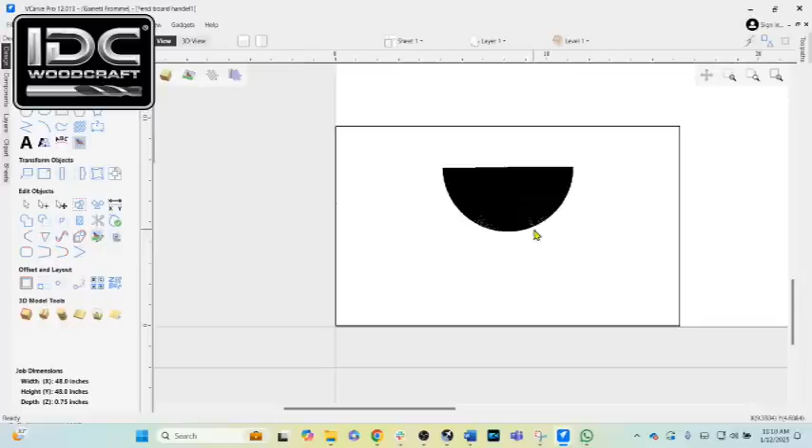So we're now in the Vectric software. I am using Vectric version 12, and this is Jerry's design. You can see this is kind of the half orange shape. Let's preview the toolpath and preview all toolpaths. And this is what his project ends up looking like. It's a very simple type of cut.

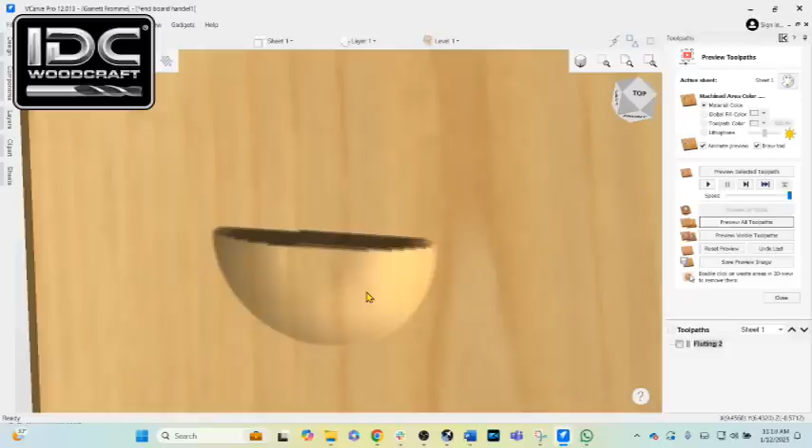Now, he's using something called a fluting toolpath. The fluting toolpath is great to use, but it wasn't going to work very well in this particular project. So I'm going to show you what the fluting toolpath is, and then we are going to get into the better way to do this.

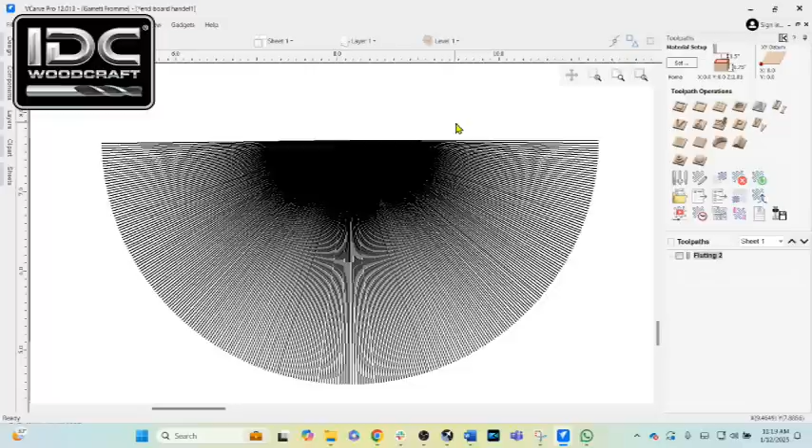So when we go over to the 2D view, let's turn some things off here. And when we zoom into it, you can see a whole bunch of radial lines. The project has all these vectors that go all the way around, and his router bit is cutting along every one of these vectors. I'm going to show you exactly what his router bit is doing. I've got to turn something off here.

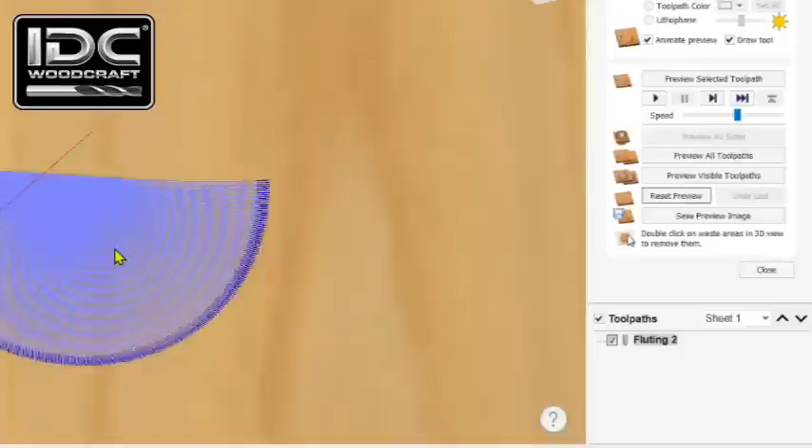We're going to go to the preview toolpaths again, and I'm going to use this slider right here and bring it down about halfway. We're going to reset the preview, select the fluting toolpath, and make it visible by clicking the checkbox here. You can see there's a lot of toolpaths in there. When we get really close, the router bit is making so many different moves.

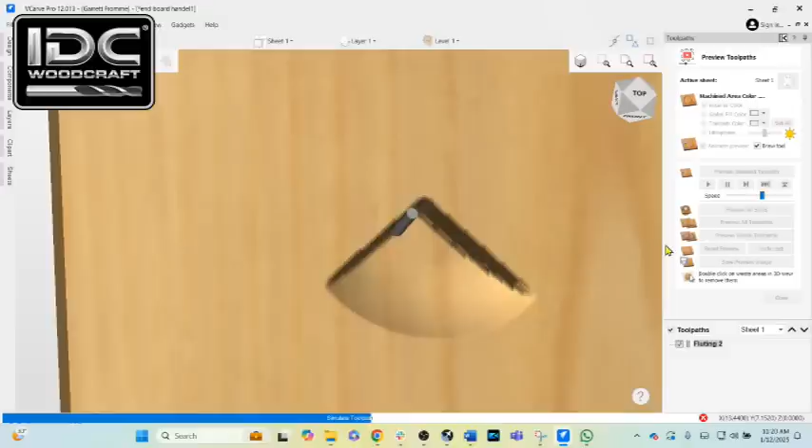Now I want to show you what this is going to do. We're going to preview the toolpath. You can see that router bit is following every one of those lines. It does that little cup shape, but you can see how it is moving around this entire project and cutting each line, just shaving a little bit off at a time. It's starting from the upper middle of the handle right in here. Just a lot of moves on the bit.

Now we're going to take a look at the time that this takes. I'm going to close this preview and click the summary of all toolpaths, and the time says 22 minutes just to cut that little handle. Jerry makes bee boxes over and over again. That 22-minute run is way too long for someone who produces this kind of stuff.

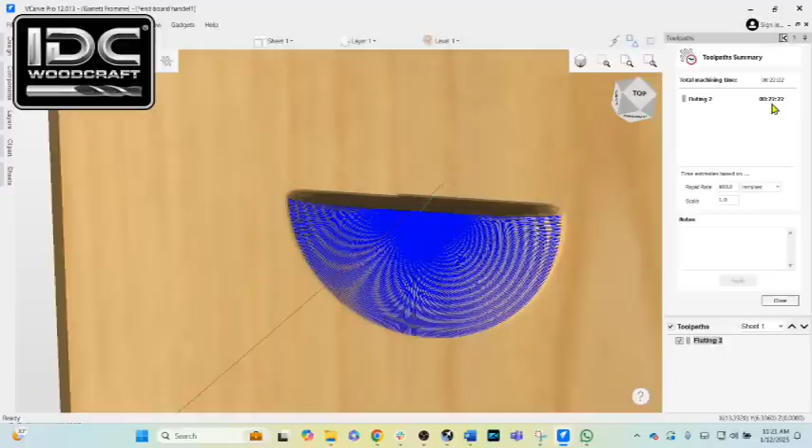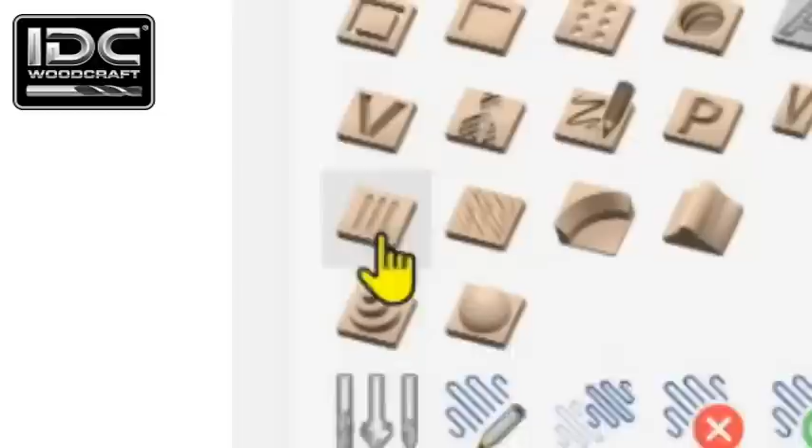So I'm going to show you a little bit about this fluting toolpath, then the quick fix that's going to cut this down to 5 minutes. We're going to close that, go to the 2D view, and zoom out. I'm going to get rid of this little box, and you can see there is a line that I drew, because I want to show you what a fluting toolpath is. We are going to go to this toolpath icon right here. When you hover over it, it says Fluting Toolpath.

Select that, and we're going to select the vector, just the line. First of all, we have to set our start depth, and that is at 0. Our flute depth will be 0.5, or half of an inch. I'm going to use a 1/4 inch ballnose end mill.

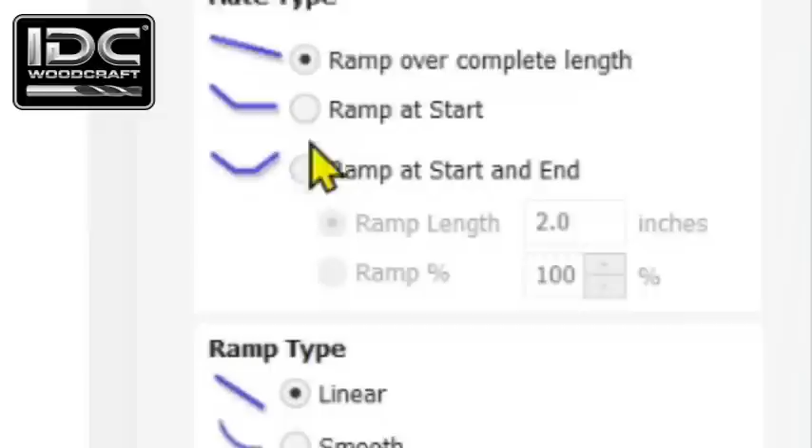Now there's 3 different flute types we can use. We can use a ramp over the complete length, so over the entire length of that line it's going to ramp in. The next one is we can ramp at start and probably ramp at a distance. And then the last one is we can ramp in and ramp out. Below that is the ramp type: there's a linear or straight ramp, and then there's a smooth ramp.

So let's fiddle with these 3 up here. I just want to show you real quick, because this is definitely something you want to learn how to use, especially if you're making something like a soap dish where the water needs to drain off. So we're going to use a linear ramp. What a linear ramp in a fluting toolpath is, it's basically a cut, and that cut is going to go in at a ramp.

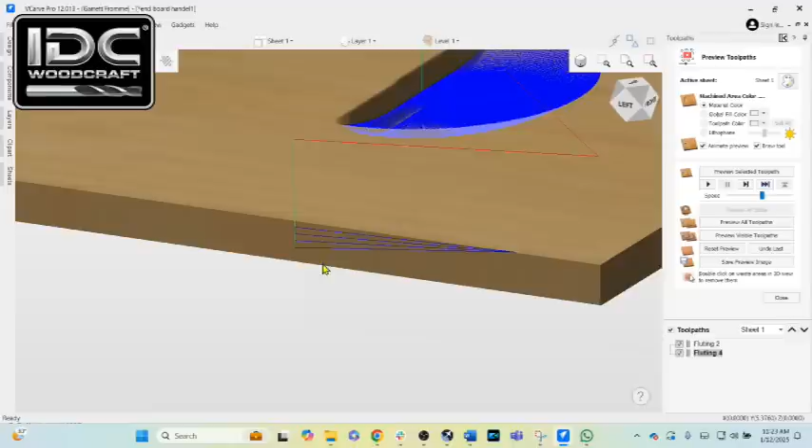So we're going to calculate that toolpath, and we're going to swing this around over here, and I just want to turn off this toolpath. You can see, let's turn that material off. We're just going to use a wire frame for the material.

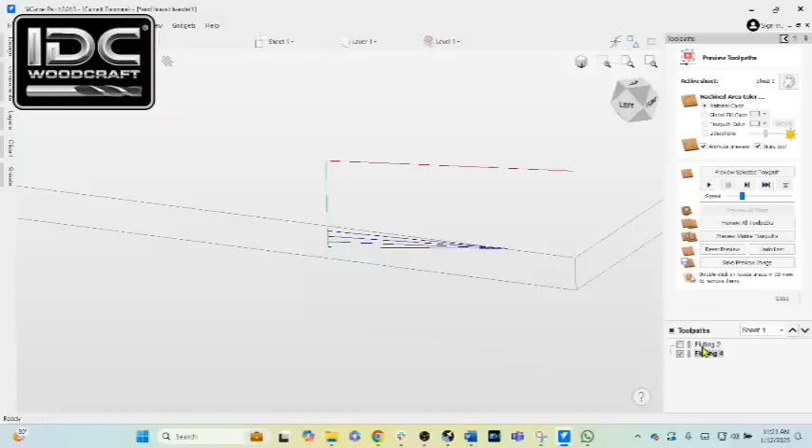There we go, and you can see how the router bit is going to go. Now what this router bit is going to do, it looks like it's going to ramp it over to here and then come back. Let's see what it does. I'm going to slow it way down, and we are going to preview the visible toolpath.

Now you see this one is checked, that means it's a visible toolpath. We're not going to preview this toolpath here. And let's preview that toolpath.

Okay, so the router bit is going to start over here, and it's going in and out and making a cut. So we're going to turn the material back on, and you can see what it's doing.

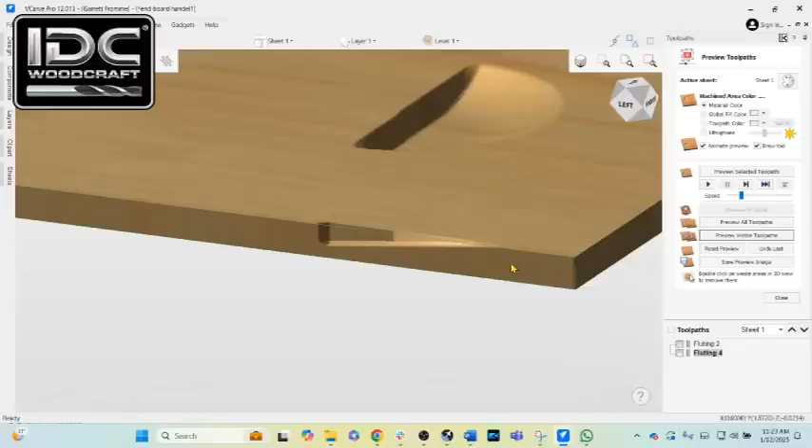I'm going to reset the preview and preview the visible toolpath. Oops, it has to be selected. And so the router bit comes in here. So it started on the opposite end, I'm not sure why I did that. But anyway, that is a flute toolpath, the one that just ramps straight in.

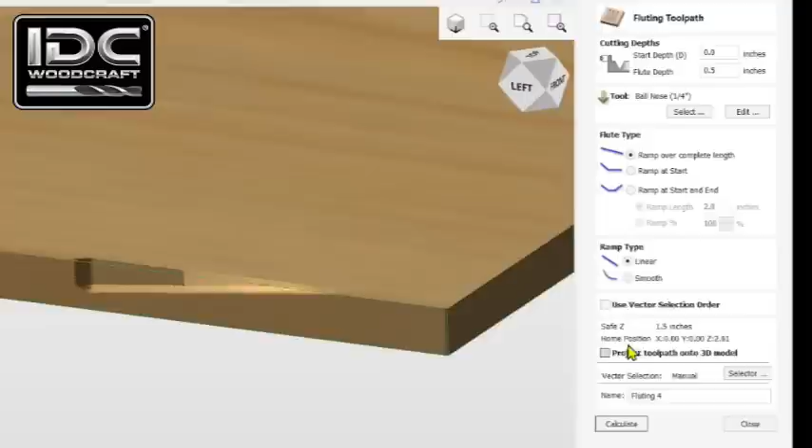Now we're going to go back into that toolpath, double click it, and we're going to select ramp at start. And we're going to set up our ramp distance.

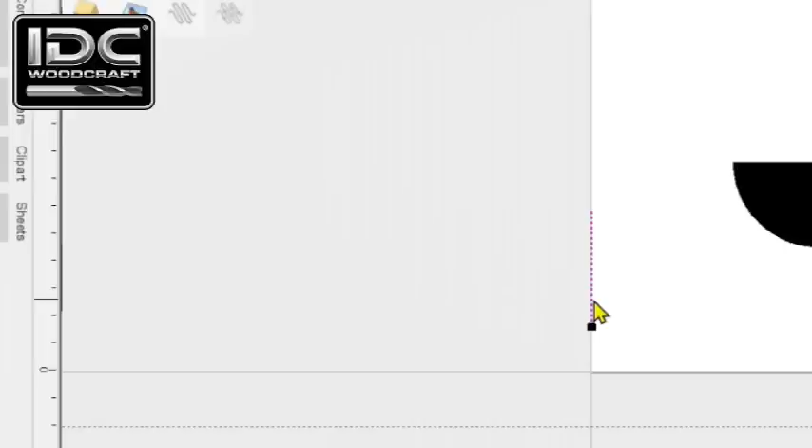My line is probably, let's see how long that line is. It is about maybe 4 inches long. The way I could tell, just quickly looking at the line, is by looking at the scale over here on the left. If we really want to know exactly how long that line is, then we can hit F11, and we can go to, I believe, where's that measure icon? I don't use it that much.

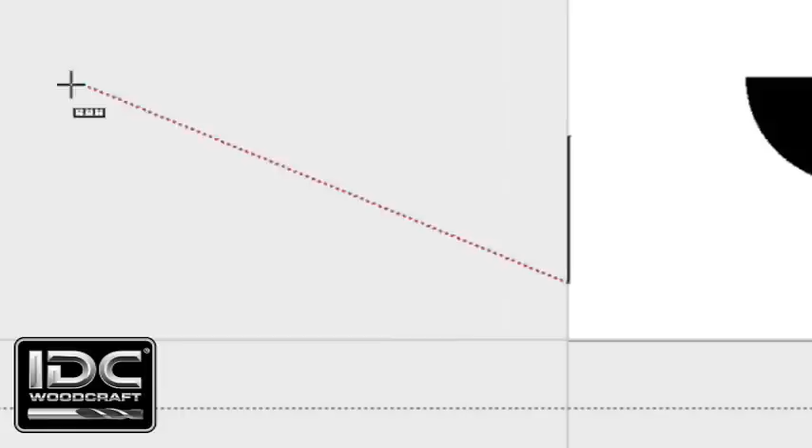So there is an icon, there it is, this is XY. We click that, and then we simply select the top of the line and then the bottom of the line. Oops, there we go, top, okay. And our line is 4.2 inches long.

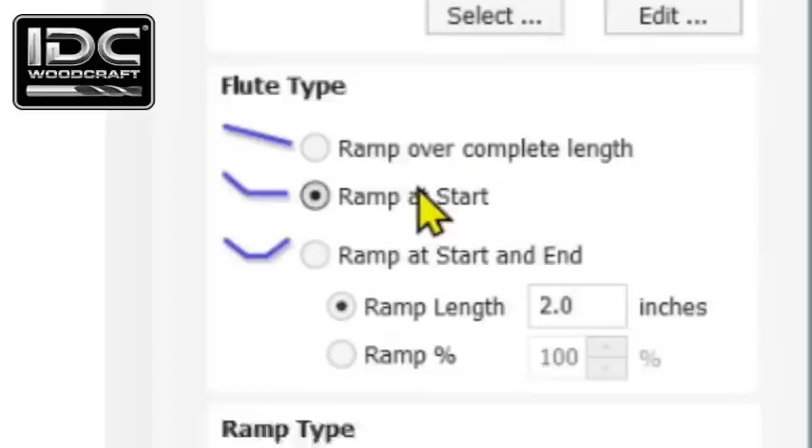So, okay, we're going to close that. We're going to hit F12 to get back to the toolpath menu, and we're back in this fluting toolpath. Now we're going to use the ramp at start, and we can dictate the length of the ramp, so it is 2 inches. We can also say the percentage of the ramp, the percentage of the line. I'm just going to go 2 inches.

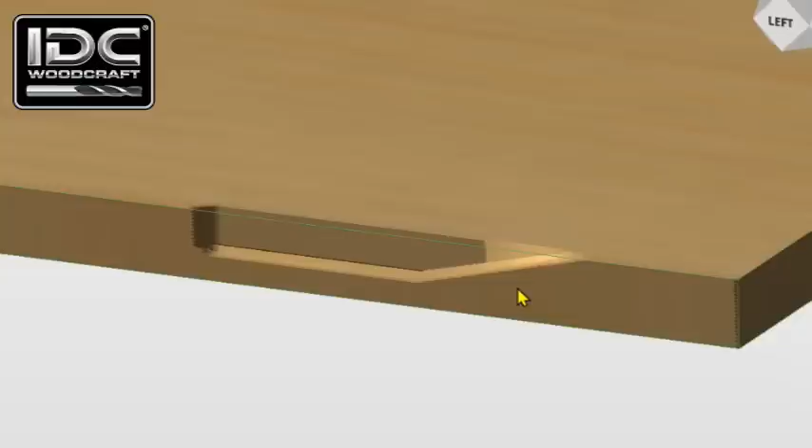We're going to calculate, and we're going to reset the preview and preview visible toolpaths. Now I'm going to speed it up just a little bit. Now you can see the flute actually goes down like that. It ramps for 2 inches, then it goes straight out.

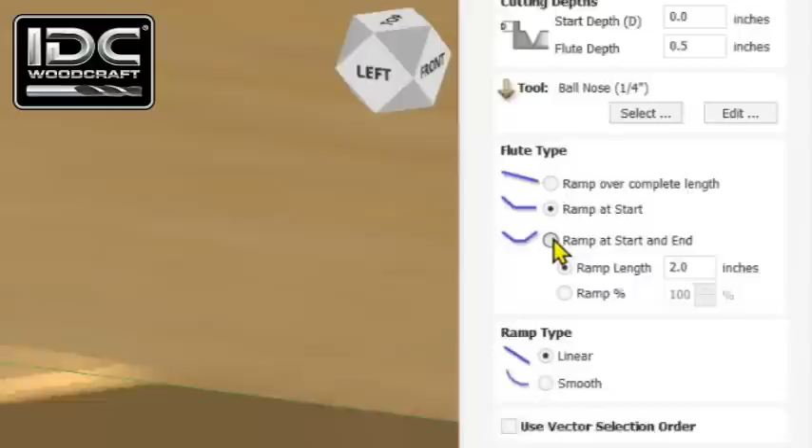Now, the one I like the best is the radiused one, but this is how the ramped flute works when you can set the distance. Now we're going to go back into that toolpath, and I'm going to ramp at start and at end. And then we're going to set the ramp length to 1 inch. What it's going to do is ramp down 1 inch, go all the way across, and at the last inch, it's going to ramp back up. So we're going to calculate that.

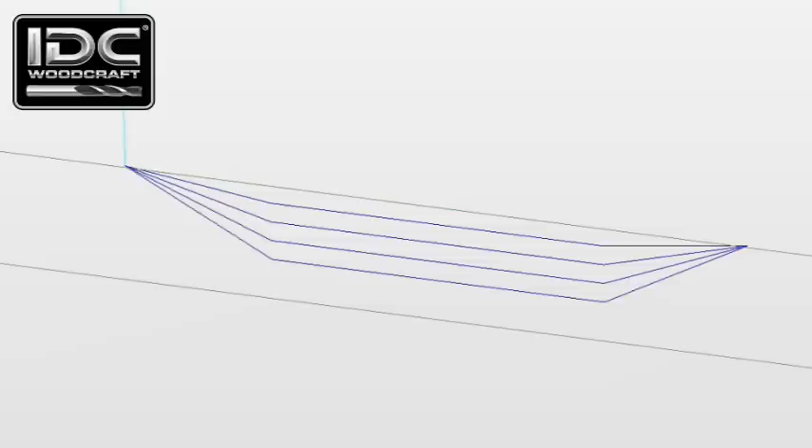And you can see in the toolpath lines, that's exactly what it's doing. So I'm going to turn that back on. We're going to reset the preview and preview visible toolpaths. And there is our fluting toolpath with a ramp on both sides. But now we can get the radius in it too.

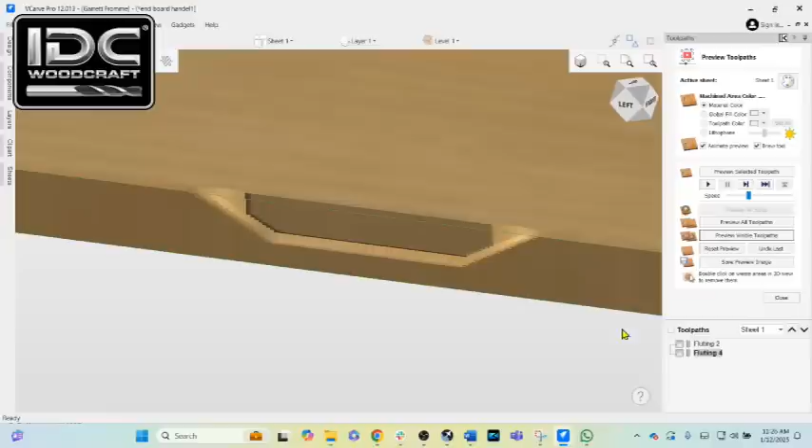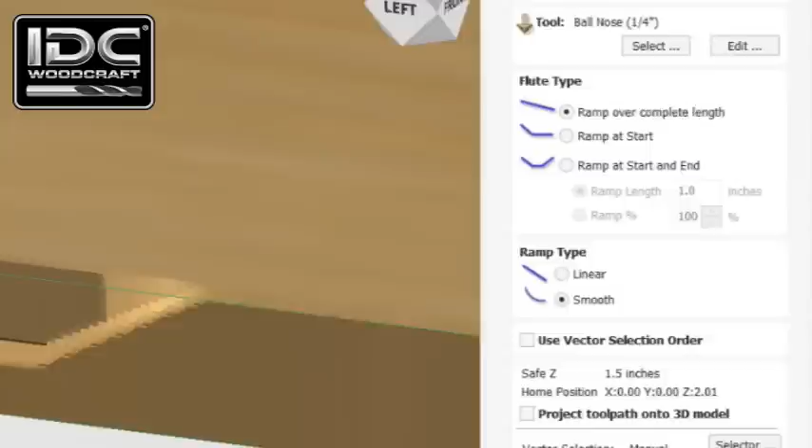This is the one that I really like. So we're going to go back into that toolpath, and instead of linear, we're going to go to smooth. And that smooth is going to be dictated relative to the ramp length. So we're going to take the linear, or the ramp, the complete length, and we're going to leave it smooth, and I'm going to calculate it, and now we're going to reset the preview and preview the visible toolpath. And I'm going to orient this to the left so we can actually see what it looks like. So what this is, basically, you can see it is an arc that it created all the way through the project.

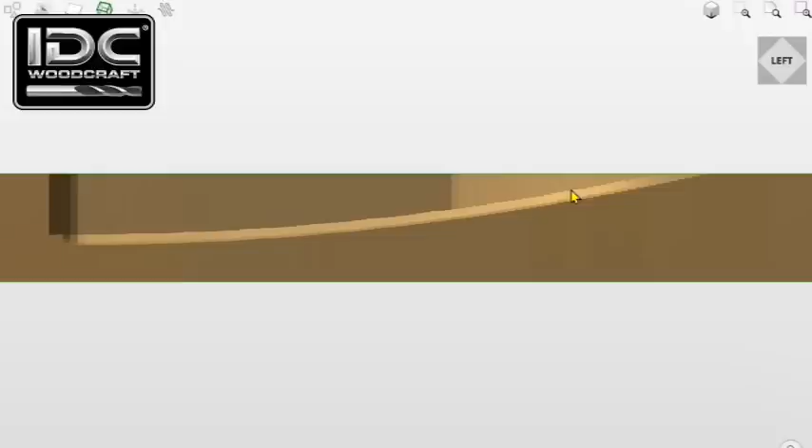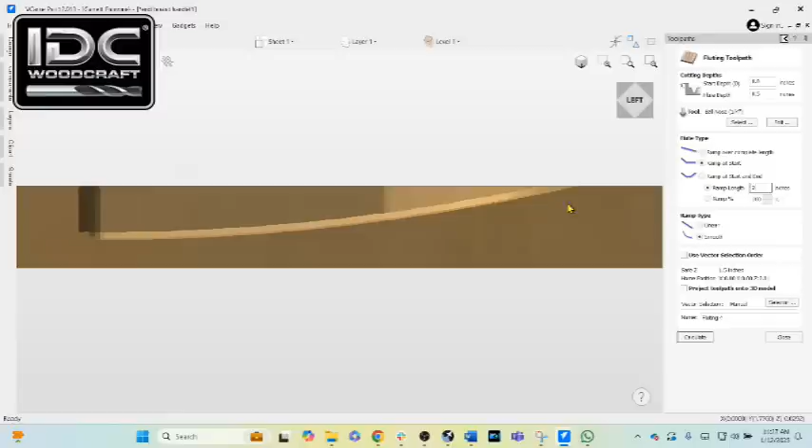Let's go back into this, and we're going to ramp at the start. We're going to use the second selection. We're going to dictate the length of it. We're going to go back to 2. And so what it's going to do, it's going to ramp at a radius for the length of 2 inches. Then it's going to flatten out and go the rest of the way. We're going to calculate, reset the preview, preview visible toolpaths, let that run through, and there you go. You get the nice little arc ramp right there, and then it goes straight.

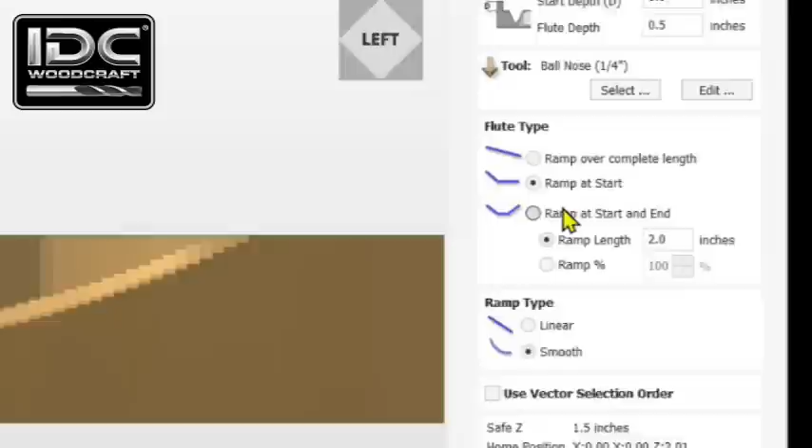One more setting with the fluting toolpath, and then we are going to go into how to fix this project that Jerry has. Now we're going to ramp at start and end. Going to click that. I'm going to go 1 inch, and with this setting, it's going to ramp down in at an arc. It's going to go across, and it's going to ramp back out. We're going to set it for 1 inch, so it'll ramp in at the first inch, and at the last inch, it'll do that arc ramp back out. Calculate, reset preview, and preview visible toolpaths.

So there you go. I hope that this little quick rundown about the fluting toolpath was helpful, because this is really about how to fix this thing up.

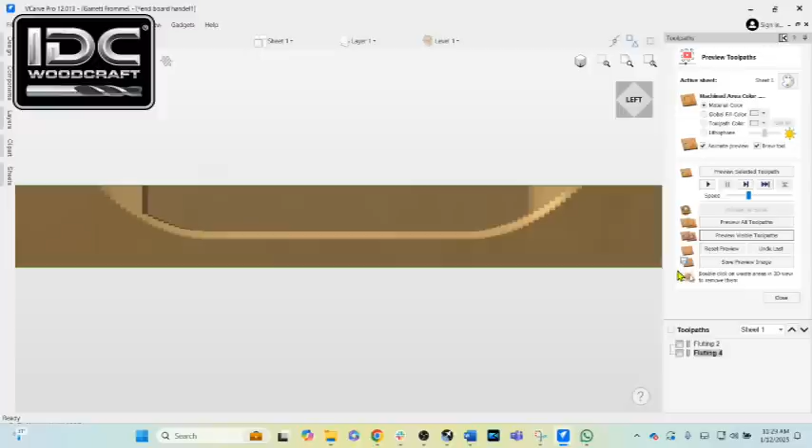So now let's take care of Jerry's project. Let's make this thing run a lot faster. First of all, I am going to delete this toolpath, and here's how you delete a toolpath. You can select it, and you know it's selected when it's got the gray highlight and it's bold, and just hit the delete button, and that toolpath is done.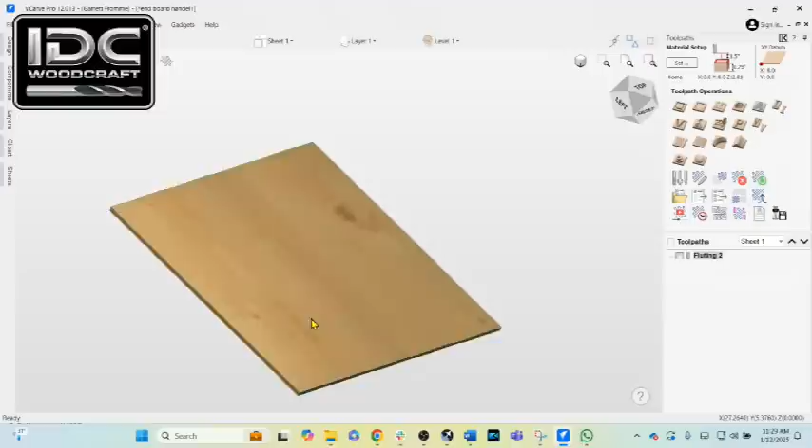I'm going to reset the preview. We're going to close this, and now we're going to just bring this out. So this is set up for Jerry's project, so it's a 48 by 48 size material. And I need to turn his toolpath back on, and there it is. And now we looked at that with the clock, and that is taking 22 minutes.

Really, really long. So here is how I redid this using the stuff in the Vectric software. Now this can only be done in the VCarve software and the Aspire software, but it's definitely an interesting little technique. And here's what I did.

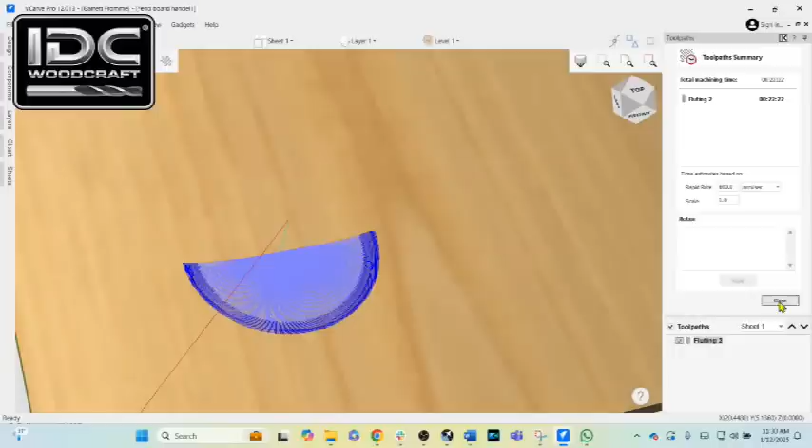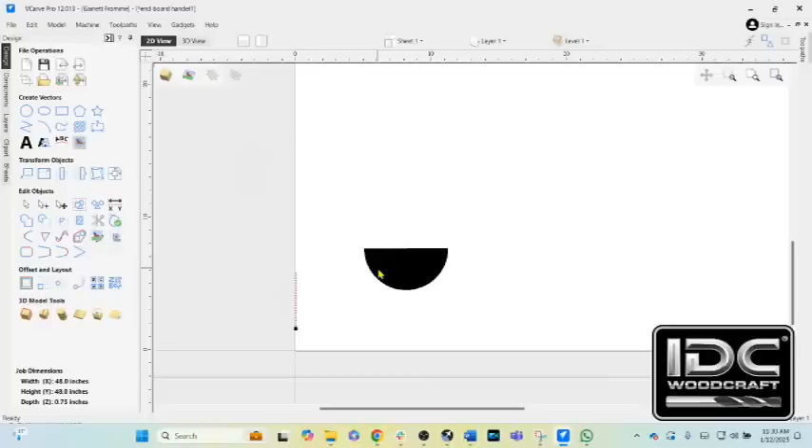So we're going to go back to the design area, and we're going to go to 2D view. And we're going to ignore Jerry's stuff here. We're going to make a handle. And the way we're going to make the handle is by using a 3D model that's in the software that comes with your Vectric software. And the way we get this model, it's going to be a dome-shaped model, is we go to Clip Art.

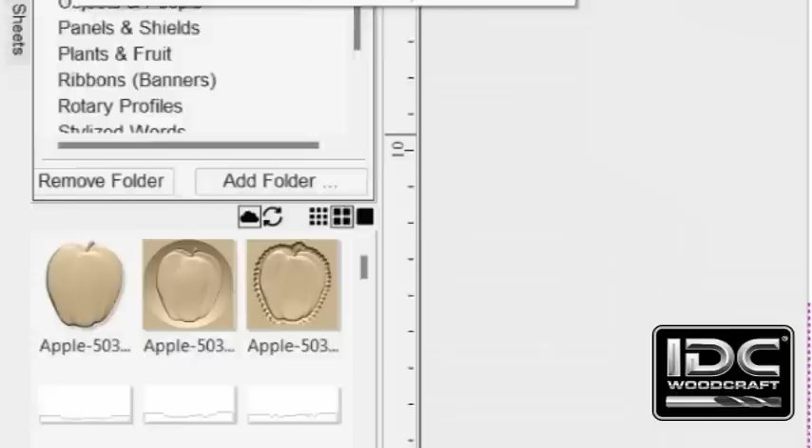There's a little tab all the way over to the left side. Select that. You'll see Clip Art and Design and Make. We want to click the Clip Art one. And this menu is going to open up. And we want to find the one that has domes. There we go. Domes is what we want. Click that, and we now come up with several domes.

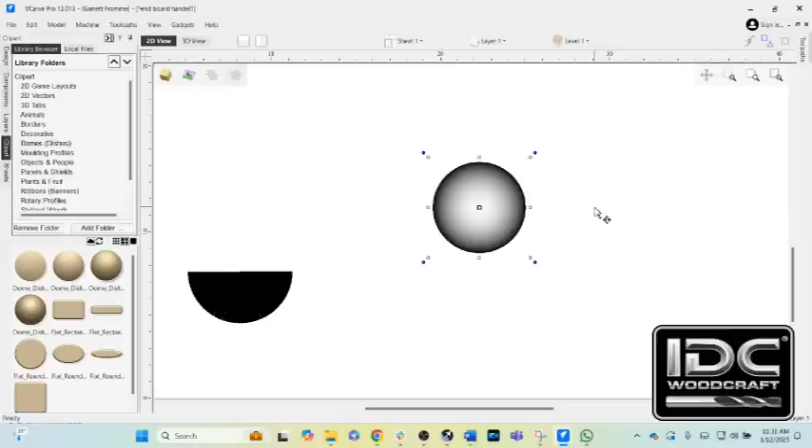Now we're just going to grab this dome right here. This is the deep dome. I'm going to just hold it with my left mouse button and drag it out into the field. Now, Jerry said, oh, I need this to be at a specific size. So first of all, we're done with the dome, so we're going to go back to the design area.

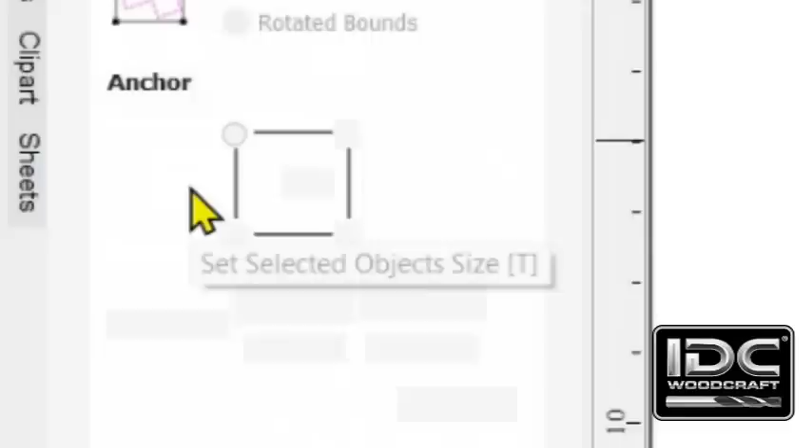So we're going to come over to this tab and click the Design tab. Now we're going to change the size of this dome to whatever we want, so we're going to scale it. The way you do that is come over to Transform Objects, the second button from the left, where it says Set Selected Objects Size. Now we can set our width and our height.

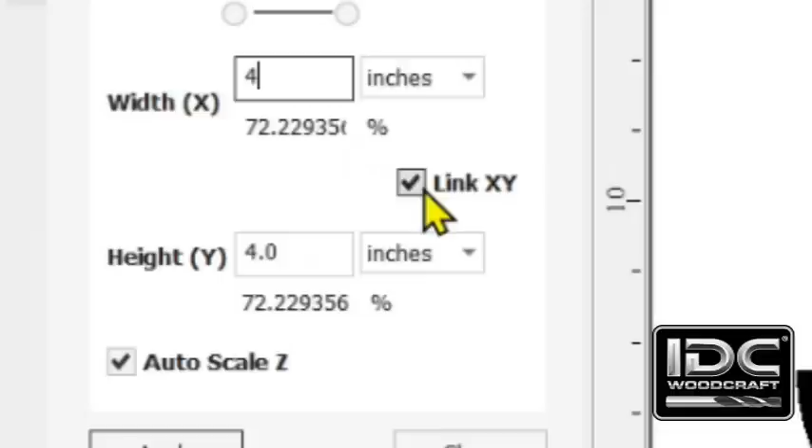He wants it 4 inches wide. We'll just say 4 inches wide, but the height needs to be different, so it needs to be taller. You can see it's 4 inches high as well, but when I have this Link XY checked, it's locking the scale of the width and the height. When I uncheck that, now I can change the height to, say, 6. Now watch what happens with the dome shape here. I'm going to click it, apply, and now we've turned it into an elongated dome.

Okay, so the handle, let's get a little bit closer to there. And it can probably be a little bit bigger, so we'll just upsize it. That's just one way you can change the size of it.

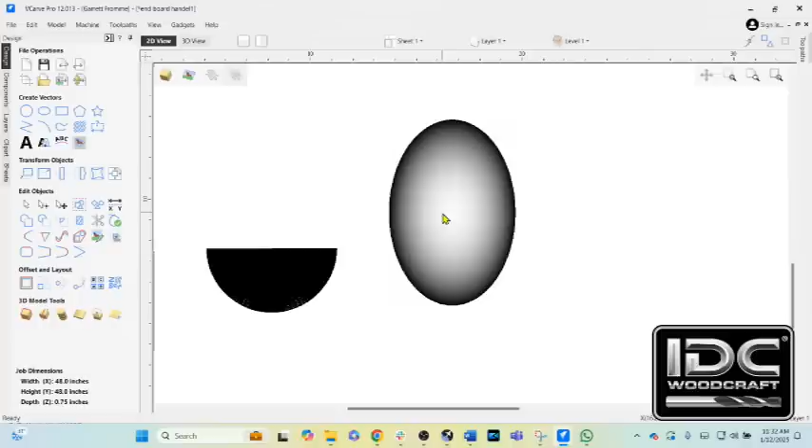So just showing you, now we only need half of this dome, but I wanted to split the screen side to side. I'm going to use this split screen button right here so we can see the dome shape. Now if you look at that, that dome is actually sticking up, and what that means is that 3D model is going to be up like that. We need to invert it so it goes into the wood so we can make a handle.

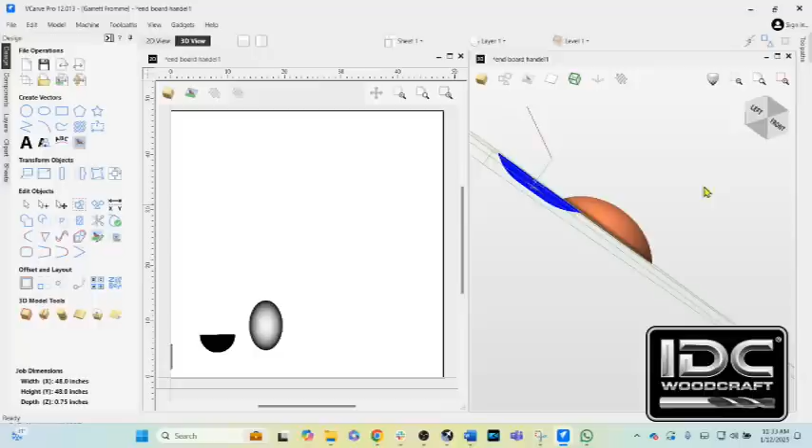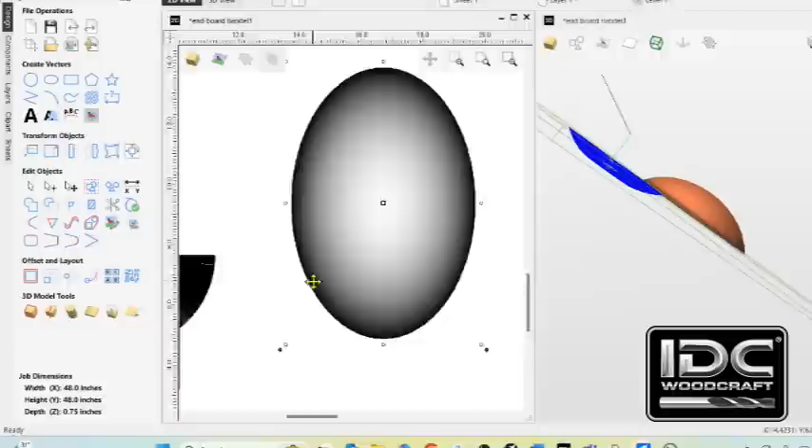First I'm going to set it up for the handle, because we're going to basically cut the dome in half using a special technique. We're going to come into the egg here and click that. In VCarve version 12 and higher, you come down to the bottom where it says 3D Model Tools. With the dome selected, we are going to click this first icon to the left where it says Create Vector Boundary. When I do that, it's going to put a boundary around the whole model, like a vector. So I'm going to click that.

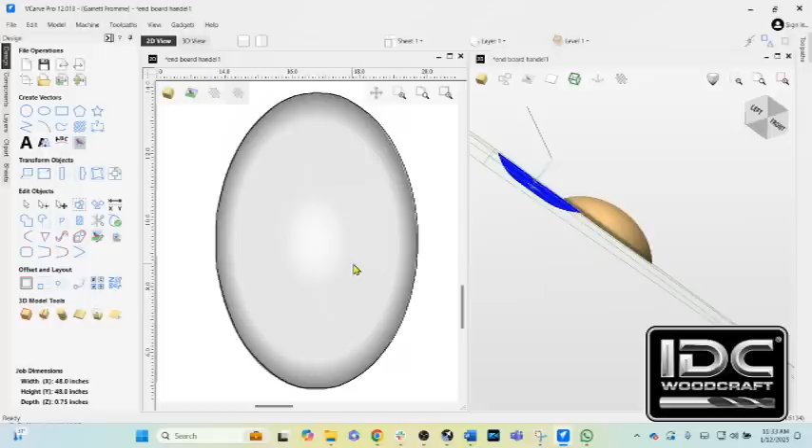We're going to zoom way in so we can actually see it. Click it, and you actually can't see it—it is right there. I'm going to click off the model. Now you can see the vector that it created, and it goes all the way around the dome. To make the handle, I basically need to cut it in half.

And here's how we do it. With the snaps turned on, these two buttons right here, they need to be like this light blue color. That means they're on. If they're off, they'll be gray, just like I turned this one off. Now I'm going to click it again—it's light blue, it's back on.

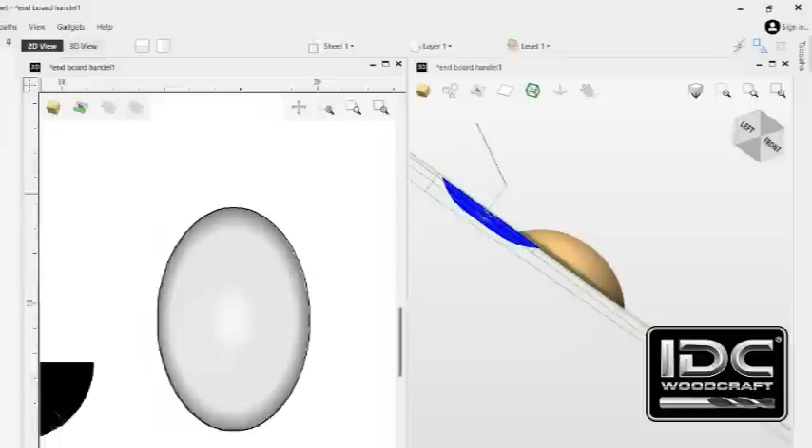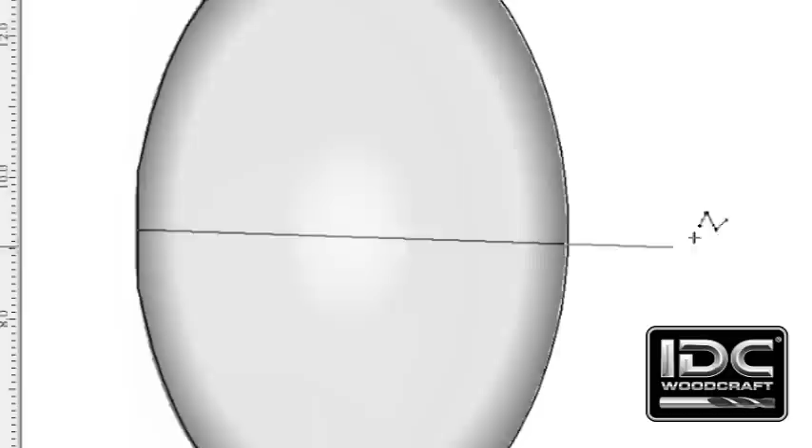We're going to get a line, polyline, straight line. I'm going to come down and find that midway point on this dome right there, which would be right where that cursor has changed. I'm going to click that, and it is now attached to that line. We're going to come across—let's expand this a little bit. There we go, and you can see that dashed line, that means it's going horizontal. I'm going to swing back until that cursor changes into that target with the dashed line, and then click.

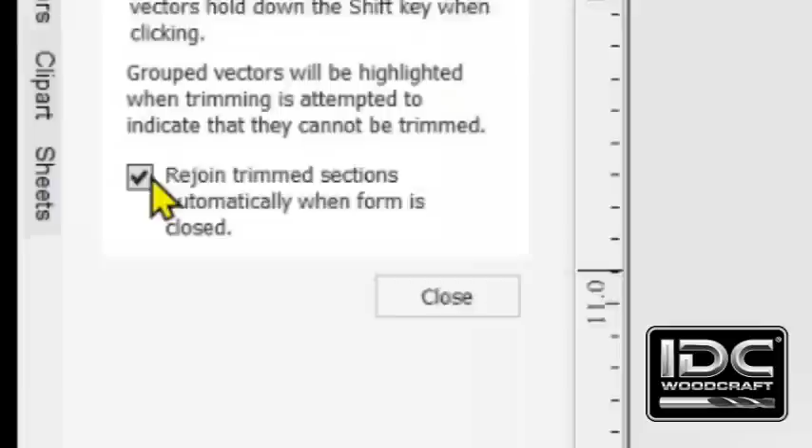Now we can hit escape to get out of line mode, and I am going to cut away the vector above this line. We're going to use the trim tool, the scissors—click that, and I want to make sure that this little checkbox is checked, because that will make sure that when we trim that away, the crossed line will rejoin with the lower line. So here we go, we're going to click that, and now we close that, and you can see what we've made. We basically made the handle shape on this thing.

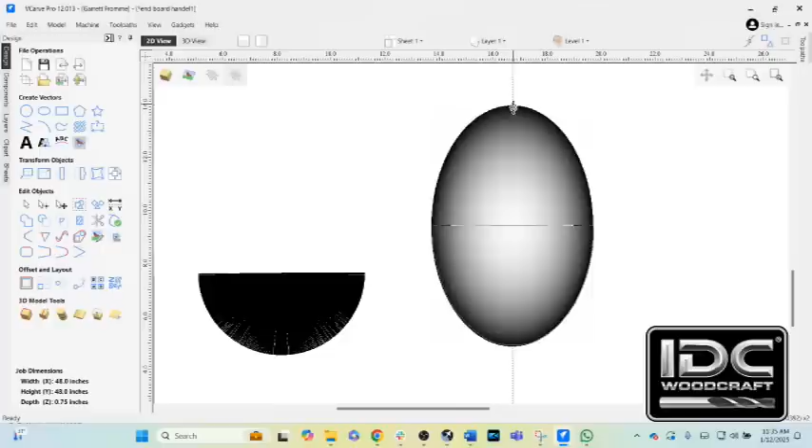It can be any size we want, any orientation. I'm going to just double click all that, and we'll shrink that down to more of a rounded size, and go like that. So there we go.

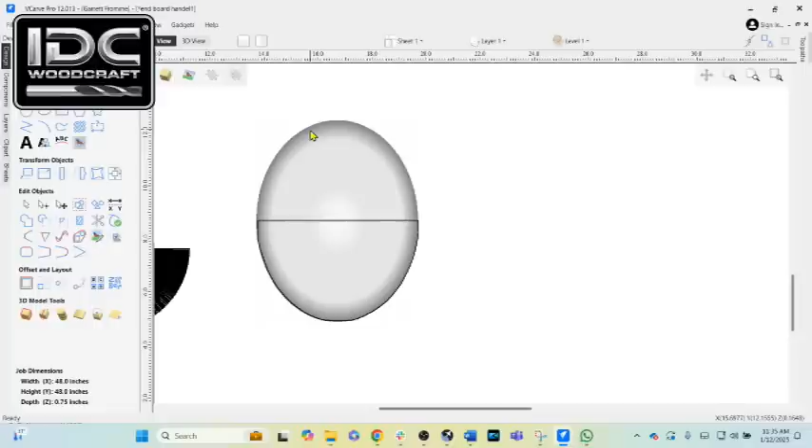Now we have to fiddle with the 3D model. We have to do some changes, because we've got to turn it from like that to inverted, or convex. So is that right? That's convex, concave—we've got to make a concave. So here's where that little 3D modeling trick comes in. It's some tools in the Vectric software.

We're going to split the screens again side to side, and I want to reorient this. We're going to click on that model in the 3D screen and click on it again.

And now you see all these little icons come up. Now the depth of his handle is 5/8 of an inch thick. The material he's using is 3/4 of an inch, and the depth of the handle is 5/8 of an inch thick. So there's 1/8 of an inch left of the material.

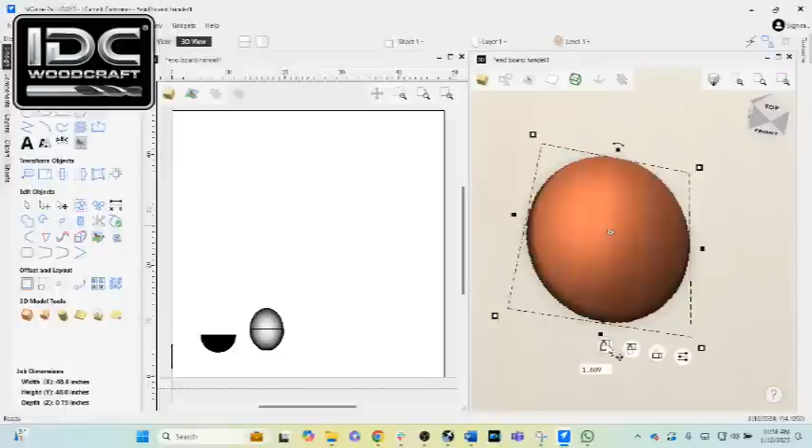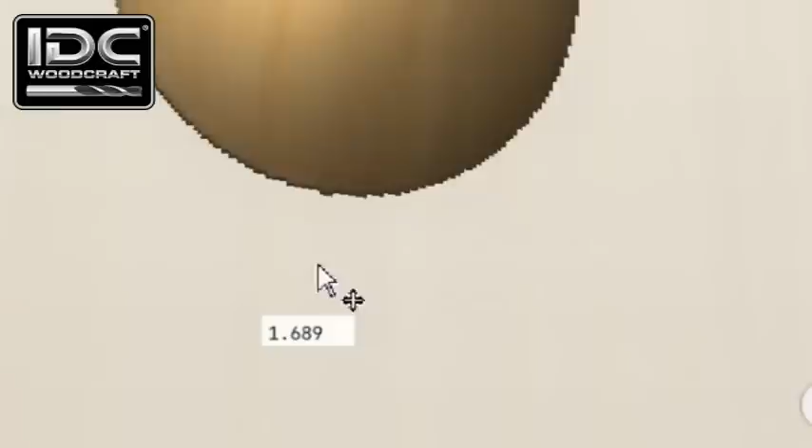So we're going to set the shape height, the overall shape height, by clicking this button right here. And you see when I'm hovering over it, the 1.689 shows up. When we click on this, now we can edit this number, and we're going to change it to 0.625 and hit enter. And now we just changed the thickness of it, as you can see right there.

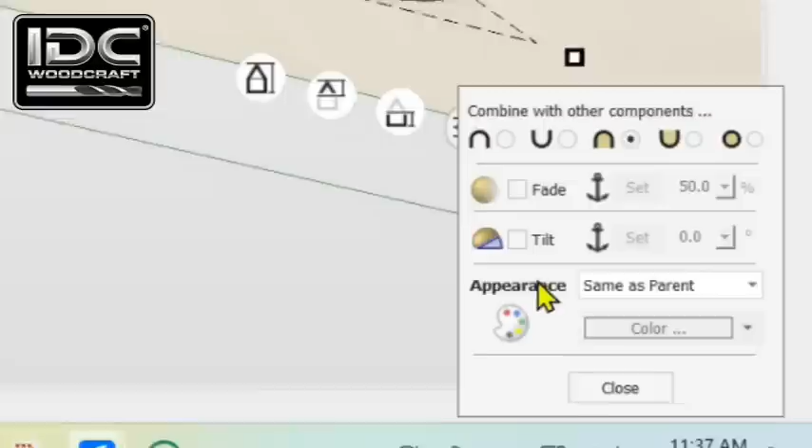But we need to invert it, and that's where this little tool comes into play. We're going to click that, and this menu comes up. Now all we need to do is go from this selection right here to this selection right here. It's going to invert the 3D model. And that should have inverted. Let's try that one right there. There we go. I needed this one, because if I did it like this, it's not working.

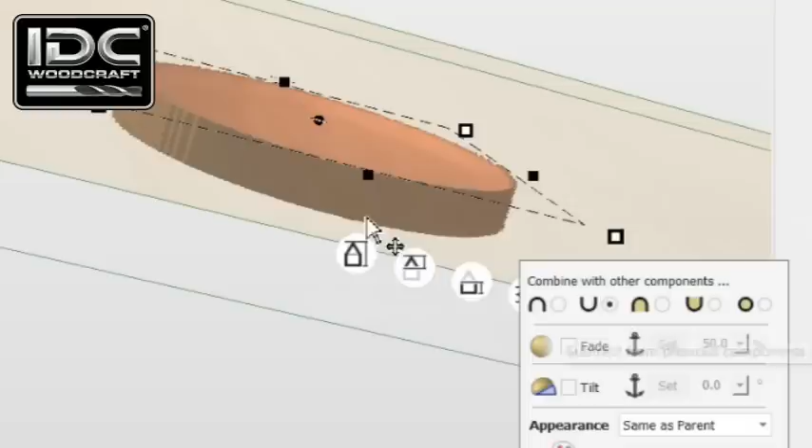So we did it with the cup where it's empty. And now what we've done is we've inverted that. I'm going to click close. When we look at it from the side, you can see it's no longer a dome shape. The dome actually goes down and in. So with that, now we can create our new toolpath. And you're going to see how much faster this really is.

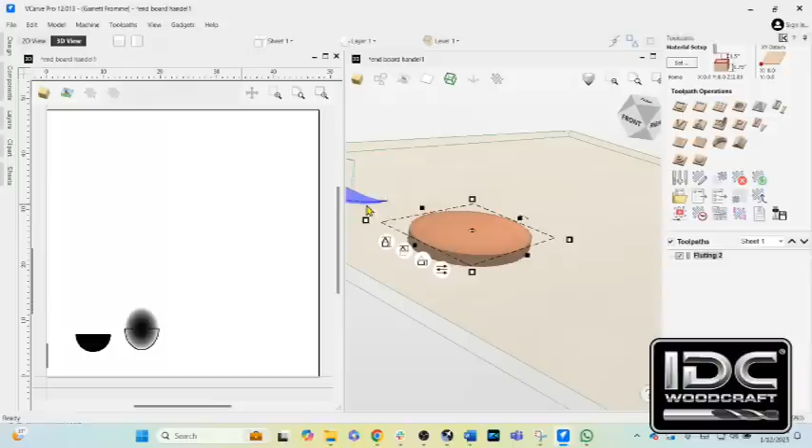And when we inverted that dome, the terminology you would use when you invert it, going from a solid to like an empty space. Okay, so we are now going to hit F12 to go to the toolpath menu. And we're going to expand the 2D view by clicking this little button right there. And I'm going to zoom into this.

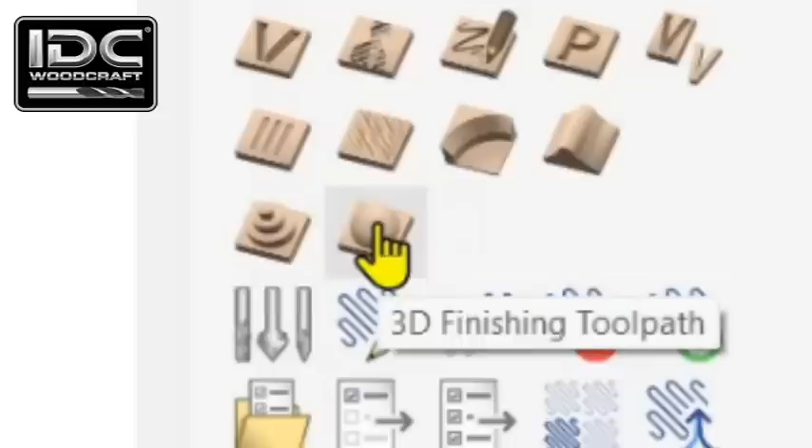Now, we are going to use the 3D finishing toolpath. This guy right here. I don't need to rough it out. We're going to use this one because it doesn't really require roughing with the bit that we're going to be using. So 3D finishing toolpath. Select that, and we now need to select our router bit. So we're going to use the Ballnose end mill.

And we're going to use the brand new Ballnose end mill that IDC Woodcraft came out with, the downcut Ballnose end mill. This bit you see right here, which is totally different for Ballnose bits, which generally leave tear out. And you can see here on this maze where it's cutting that there is literally zero tear out at the top of the project. That's why I came out with this bit, because Ballnose bits leave tear out, and tear out is a pain on projects. Tear out and chip out, that is.

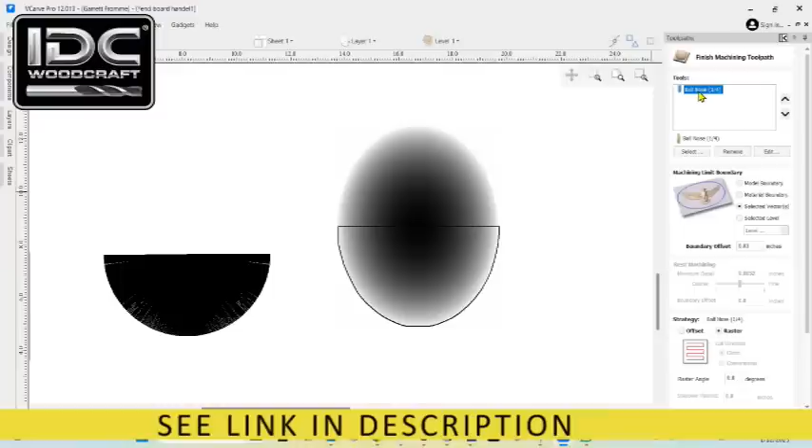All right, so we are now here. I got to select the Ballnose end mill. First of all, I want to get rid of this one, so we're going to hit remove and select the new one. We're going to come down to Ballnose end mills, and right here I've got the downcut Ballnose 1/4 inch. Select that and select. And now we have to set up our

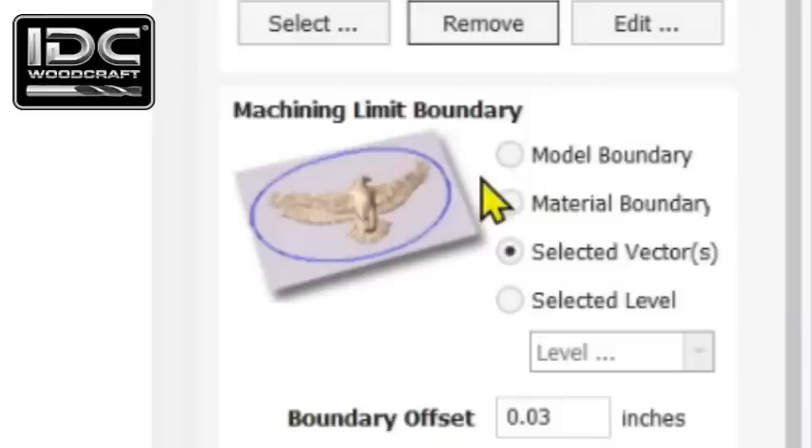machining boundary. Well, we're going to use the selected vectors. We just created the vector, which is half the shape of that dome, and we're going to select that vector. So we're going to select the vector, and we need to make sure that this is checked. We don't really need to worry about boundary offset. That should be set to 0.03.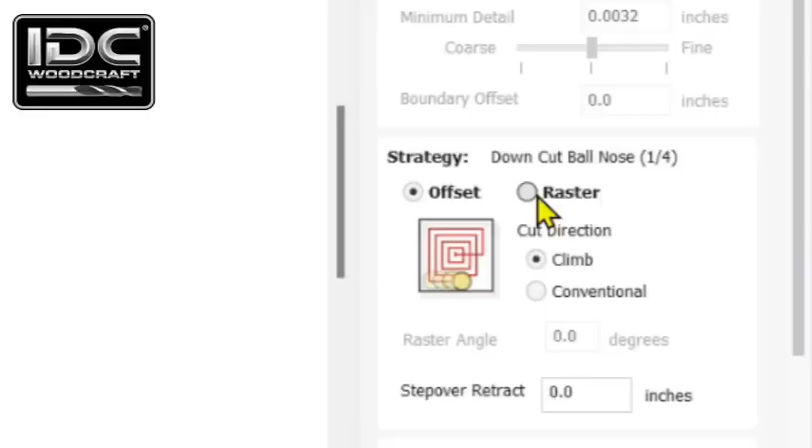And then I want to use raster, not offset. Offset will start right in the middle of it, and it won't cut well. It just won't look as good. So we're going to use the raster cut. And the raster will start at one part, and it'll just cut back and forth as it moves up.

Now, before we actually finish that, I want to check the offset or the step over allowance on the Ballnose. So we go up to the edit button, and this menu will open up. We have a 7% step over.

We'll go with that. I'm going to make it a 10% step over, because that's going to affect the time. We're going to click OK, and now we're just simply going to calculate this. What I would do is name it. We'll call it handle BD14. BD14 is the SKU number for the downcut Ballnose bit. We're going to click calculate, and let's take a look at this toolpath.

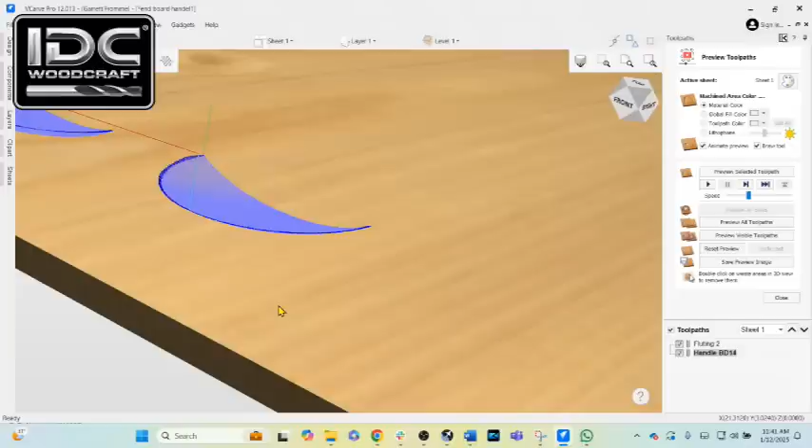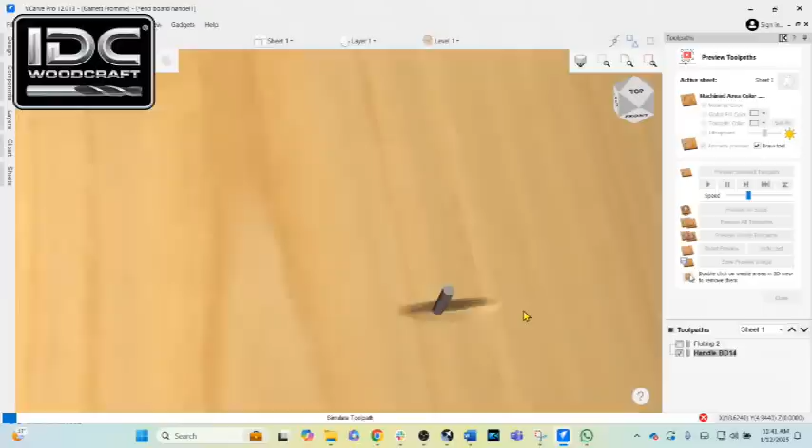Now, when we look at Jerry's toolpath, you can see there's many, many toolpaths. Here, we are literally going back and forth, back and forth. Now, I'm going to run this toolpath. We're going to turn his off. We're going to preview visible toolpaths. And we can see now how this is cutting. I'm going to turn that up a little bit. And because this is only taking a 10% step over, we can turn the feed rate way up on this bit. So I am going to stop this toolpath by clicking the little X.

We're going to close that. We're going to click the clock. I want to see what the difference is. So his is currently taking 22 minutes. Ours is taking 9 minutes. That's still way too long. So we're going to shorten this up by increasing the speed on this and even the step over. Remember, this is a handle on a bee box, so the finish is not that critical.

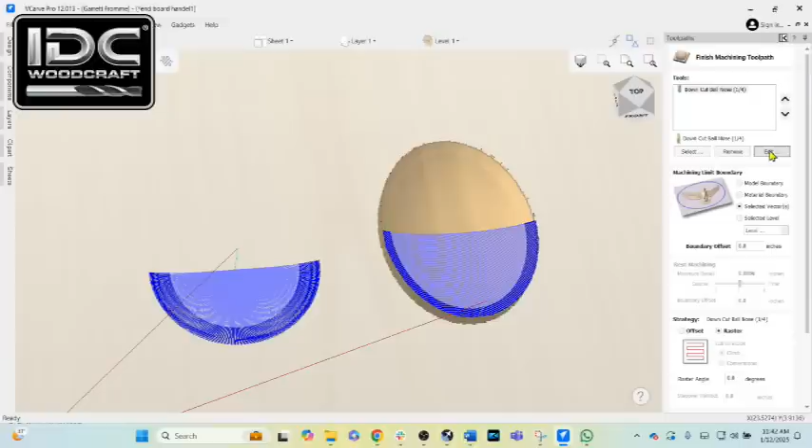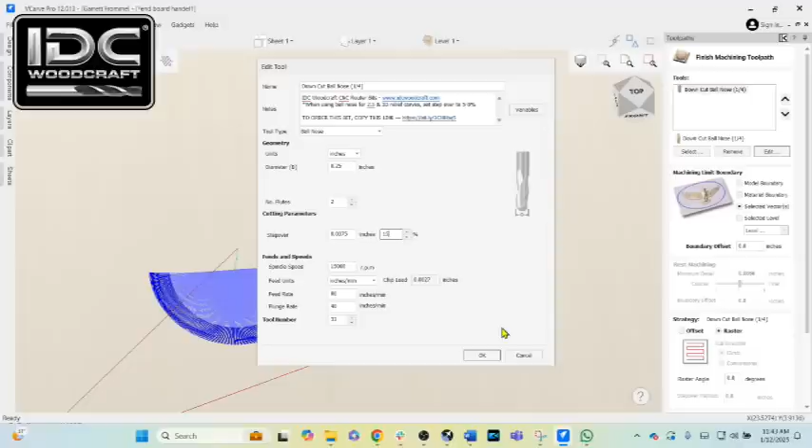So we're going to go back into the handle, the toolpath I just made. I'm going to go to edit for the bit, and I'm going to increase the step over to 15%. Generally with the Ballnose bits, you need low step overs because commonly they're used for 3D models, but if you have too much of a step over, you're going to get these little ridge lines. In this case, it's a bee box. It doesn't really matter. It's going to be outside. So we're changing that to 15%, and I'm going to change the speed to 150 inches per minute. Click OK, recalculate,

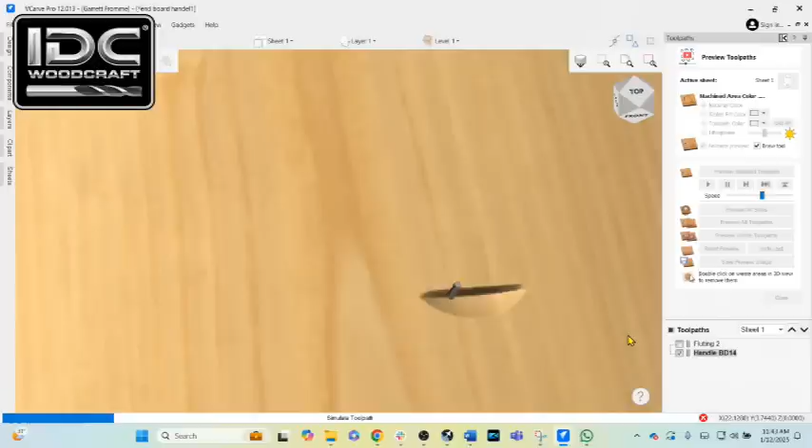and then reset the preview, and we're going to turn his off, and we're going to run mine, and there we go. As it runs out, I'm very curious how we adjusted the time on this. And we can let it run on out. I'm just going to stop it. Well, it's almost done. Okay, that's it. We're going to close that, take a look at the clock.

We went from 9 minutes to 3 minutes by increasing that step over by 5% and increasing our feed rate, doubling our feed rate. The reason I could double the feed rate is because we're only shaving off 15% of the width of that router bit. So it's going to go really fast. We're going to go out to the CNC machine and run this out.

All right, we are ready to go, and I have the Ballnose set up. I've been using this a lot. I've made a whole bunch of marble mazes for Christmas, so I got some pitch build up on the back of the blades there. So I'll have to clean that up. But let's see how fast this thing runs out. Here we go. This should go quite quick. All right, wound up. There we go.

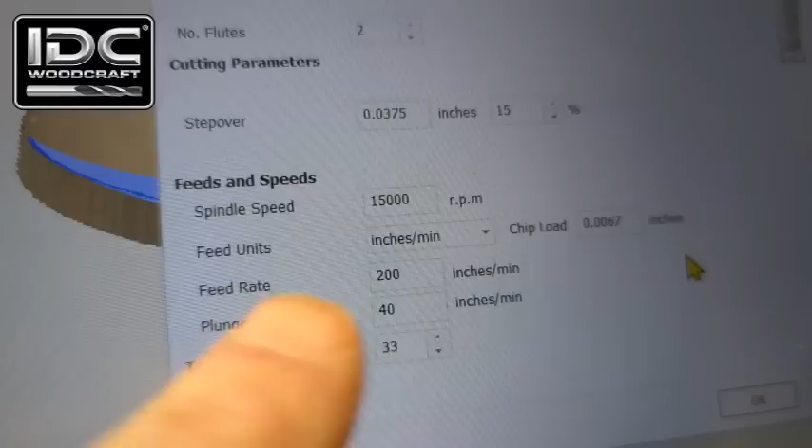So that took about 2.5 minutes. I had actually turned the feed rate up to 200 inches per minute, and the finish is almost not noticeable with that, but that's still actually a pretty large handle. That was much faster than what Jerry had, and I had sent this to him, so he should be in good shape now. So I ran the bit at 15,000 RPM, 200 inches per minute, and the chips actually are really good for this. For this type of project, definitely good.

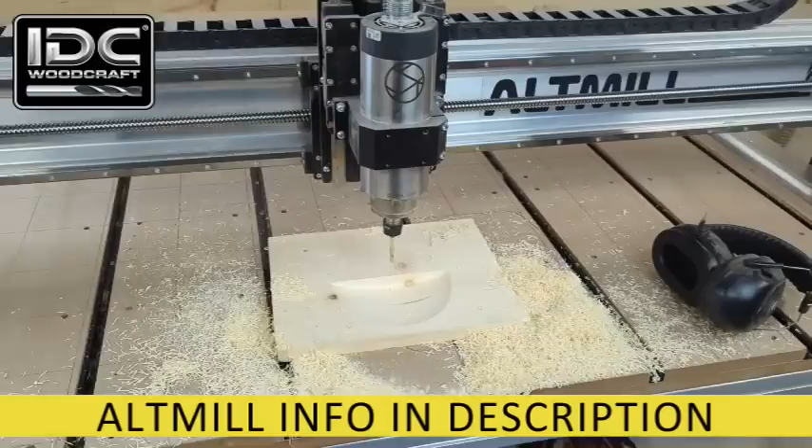Now you can see I screwed the board down, which is the best way you can hold a project down. This was run on the Altmill CNC router. Nice spindle, can handle this type of workload at that feed rate. I'm going to run one at 400 inches per minute. Same program, same settings. Let's see what happens. All right, here we go at 400 inches per minute.

That was 1 minute and 30 seconds. And not much difference, a little bit rougher in there. Wow, this bit performs. So does this machine.